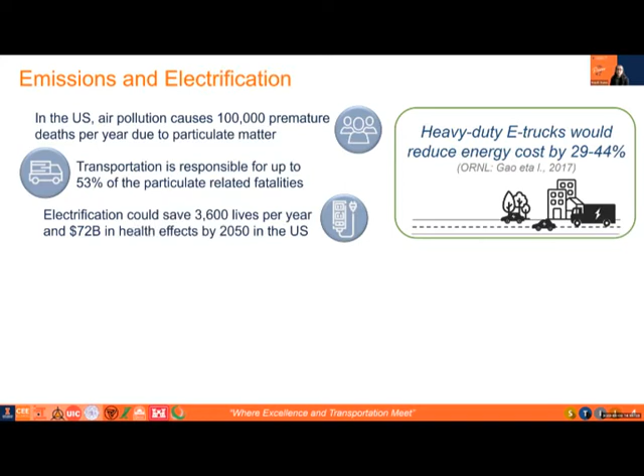Some studies have identified that by introducing electrification, facilities to support electric vehicles could actually save over 3,600 lives per year, in relation to $72 billion in health effects, with the goal of increasing electrification by 2050 in the US. Correspondingly, the Oak Ridge National Lab estimated in their 2017 study that up to 44% of energy savings can be reached related to electric heavy-duty trucks. So quite a good amount of savings, not only with respect to air pollution, but also energy usage.

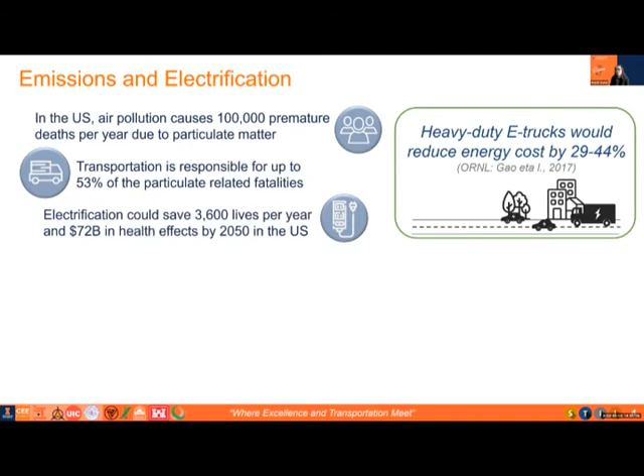For Illinois, just last fall we had recent legislation passed in September, particularly the Climate and Equitable Jobs Act, whose main goal is to be carbon-free in the power sector by 2045 and 100% use of clean energy by 2050.

The month after that, the state also passed the Reimagining Electric Vehicles in Illinois Act, or the REV Illinois Act, where the goal was to reach 1 million electric vehicles by 2030, and also identify tax incentives that can be created both for EV manufacturers and suppliers - the whole scheme of where EV will be touching.

At this point, some other studies can also improve congestion, which we can tie to how it can change Illinois. The studies have reported that leveraging the connectivity between vehicles, even in platooning - simply how they're placed as they're moving through our highways - could improve fuel economy by 39%.

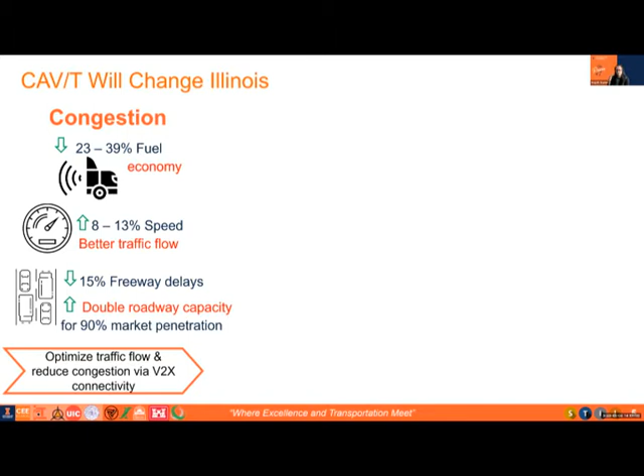And because of that connectivity, one may anticipate that we can increase speed, which also can be related to improved traffic flow, reduction in delays by 15%, and assuming a 90% market penetration of connected autonomous vehicles, it may double our roadway capacity, as you can see here, which will be really nice as it can reach our goal in optimizing traffic flow and reducing congestion simply by leveraging that vehicle to everything connectivity.

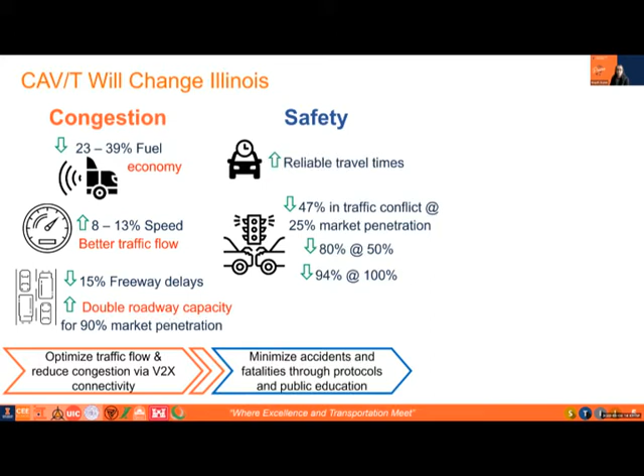Now, with respect to safety, that's also something that the introduction of CAV&T, properly done, can really improve, as that connectivity can also leverage providing more reliable travel times. Researchers have estimated that as you increase market penetration, traffic conflict can range from 47 to 94% when market penetration ranges from 25 to 100%, which we can anticipate will help us minimize accidents and fatalities by leveraging how we can create new protocols and also extending that to public education.

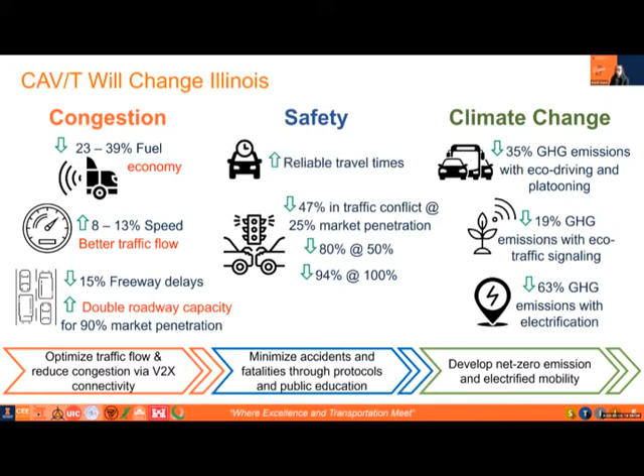And correspondingly with climate change, with the changes I've hinted at previously, some researchers have identified that by implementing eco-driving and platooning, greenhouse gas emissions can be reduced by 35%, and correspondingly with eco-traffic signaling, a 19% reduction in greenhouse gases, and electrification can further reduce greenhouse gas emissions by 63%, which, connected to some of the laws that Illinois just adopted last fall, will help us meet this goal of developing net zero emission goals and an electrified mobility.

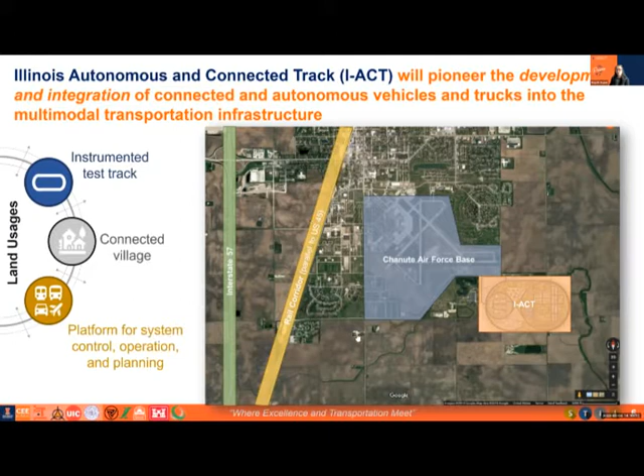And also we have the village of Rantoul just adjacent. So highlighting that apart from the facility, we also have nice options for validation and other jurisdictions that we can work with, just within 1 mile of proximity to the IACT.

As we know, right now we're all at home, or I hope you're staying at home given the snowstorm we're undergoing, which is going to be a critical issue when connected autonomous vehicles get on our roadways.

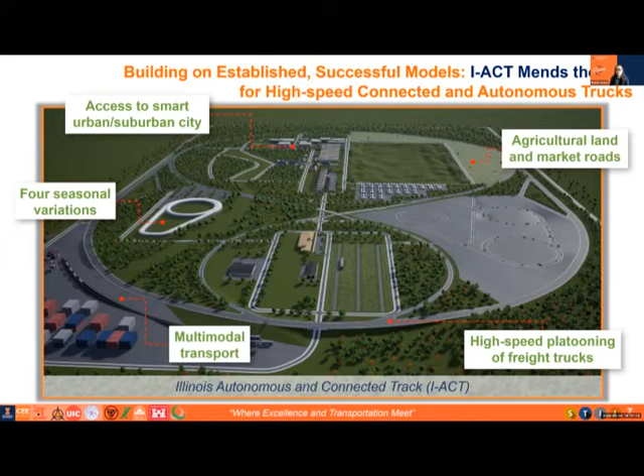So here's a short video, and let me remove the sound. We're zooming into Rantoul, which we just saw on the map earlier, and now we're going to be driving through the facility.

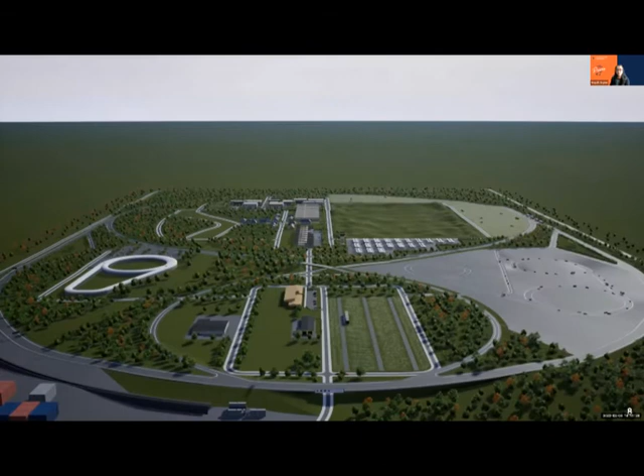So we'll start with here, this is the outer loop. We have 3 lanes that the freight trucks can platoon constantly at 75 miles per hour, which will be the fastest speed that a track can host a continuous platoon looping over the entire I-ACT.

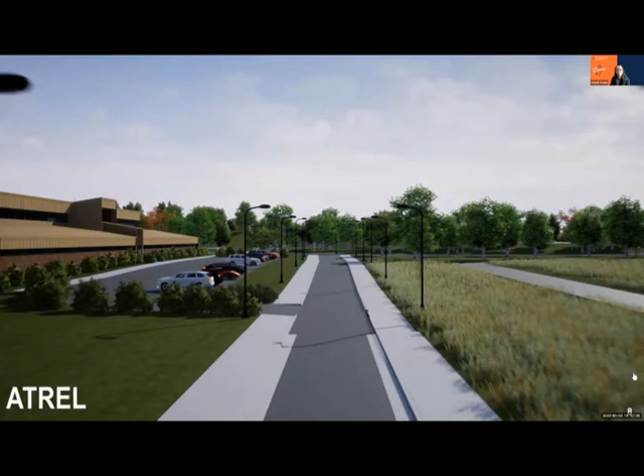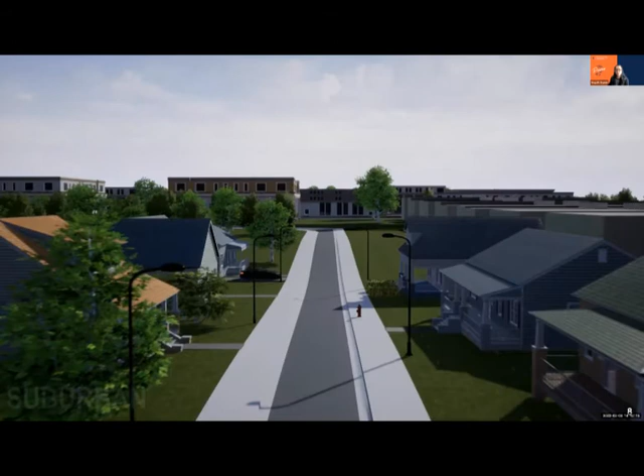We're going now to the inner loop, and that's important—you can imagine that, maybe related to arterial roads. Here on the left are actually existing facilities. Our lab, ATREL, the main infrastructure of ICT, will have a control tower for new offices. And here, a suburban and urban setting for more test cases and scenarios.

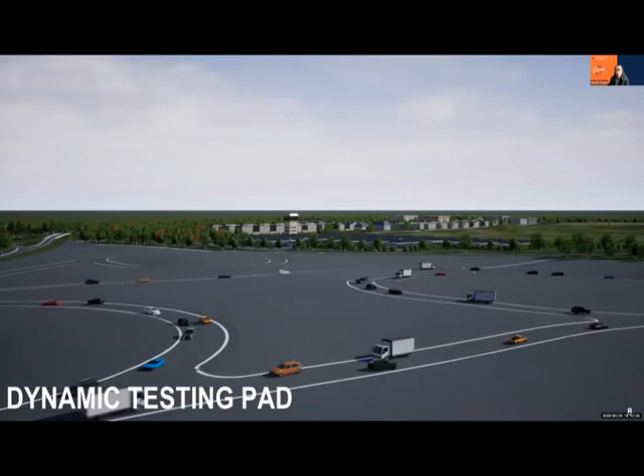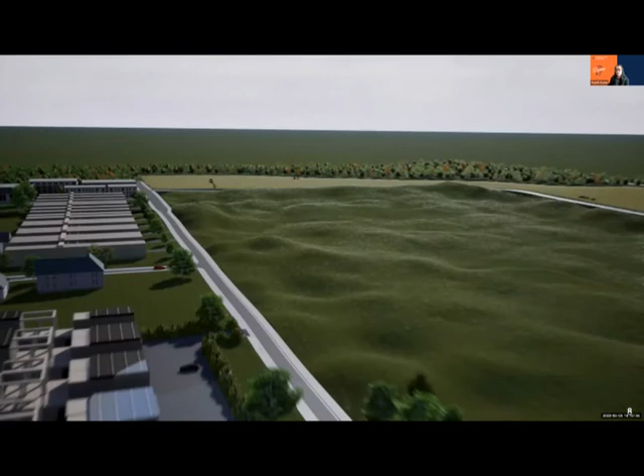We'll also have an environmental test chamber where we can subject vehicles to different conditions, and a dynamic testing pad for different vehicles. Multimodal mobility with rail, and also an agriculture testing area, trying to capture the cases in Illinois and beyond that we can anticipate as we're growing into adopting connected and autonomous vehicles. And so what we believe in is also building on Illinois' strengths.

I've mentioned that speeds can be up to 75 miles per hour, with different controlled weather across 4 seasons, urban and suburban settings. With the mode of transportation, we've seen there will be different modes as we anticipate what our infrastructure handles, and the infrastructure itself will be connected. I'm not only talking about putting sensors in the roads, but also in bridges, potentially tunnels. These are under discussion as we plan I-ACT, along with the energy grid as we support electrification and energy harvesting needs for the track.

So I've said some of the key things I-ACT intends to focus on and harness: high-speed freight platooning, multimodal logistics, and the development of protocols, where the findings will boil down to how to safely deploy these technologies and vehicles in a connected infrastructure.

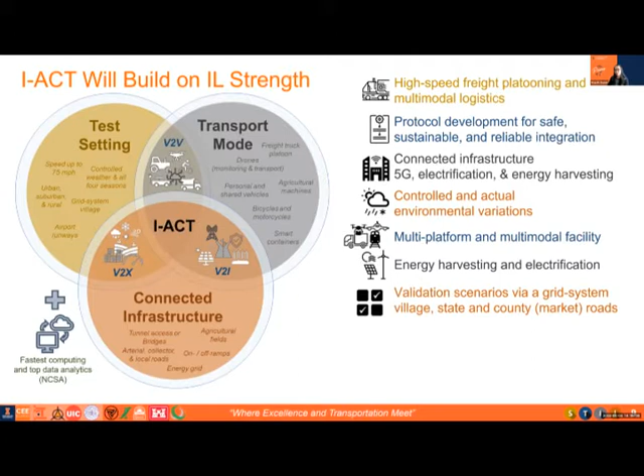I've highlighted in the map earlier the proximity to Rantoul and adjacent interstate or local roads. That also offers validation scenarios for us that can closely relate to the controlled conditions we'll have in I-ACT.

Speaking of Rantoul, this is also quite important economically and socially, as Rantoul used to be a really active town, given it was a training ground for the Air Force, but since it closed down in the 90s, there has been a decline.

So not only does I-ACT offer opportunities to incentivize research and collaboration opportunities, but also direct economic growth within Rantoul, scaling up to the county and to the state and beyond.

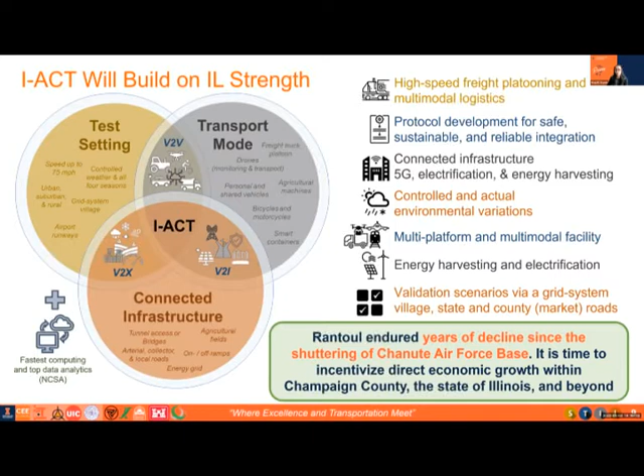Also, education and training programs are part of the award for the Investment for Growth.

Today, after my presentation, either Professor Chen or Professor Ouyang will be sharing with you what this project is about: modeling and testing autonomous shared multimodal mobility service for low density rural areas.

I do want to highlight that 2 other projects will be highlighted next week for V2V sensor streaming and wireless continuous monitoring. Towards the end of this semester, by April 28th, we will have Professor Kwiat share their findings related to the quantum communication network.

As I've mentioned, part of this growth program grant was also to create a new education training program, which will be a Master of Engineering in Smart Mobility. It will be cross-disciplinary, with 3 tracks currently under plan: a certification program for professional students, and then 2 master's programs related to autonomous mobility infrastructure systems and mobility services, economic and policy.

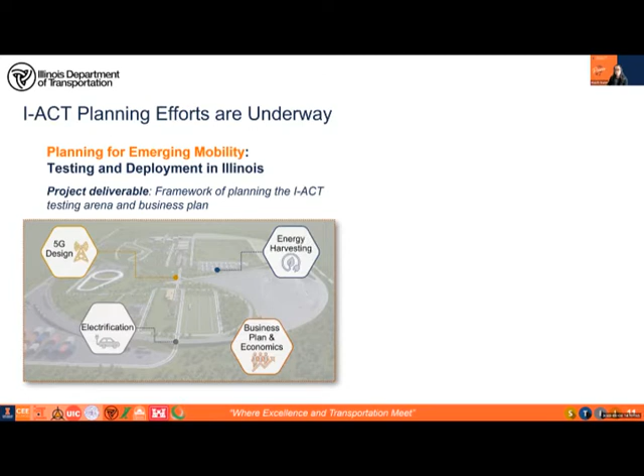Adjacent to that, we also have an IDOT-sponsored project focused on identifying frameworks related to 5G, electrification, and energy harvesting as part of the I-ACT testing arena, and also the business plan.

In parallel to that, we have a project I'm quite excited to be part of, Mobility 4.0, where the main idea is to create a roadmap or blueprint identifying, within the state of Illinois, what resources and activities are happening to clearly prepare and identify Illinois' readiness for connected autonomous vehicles.

Now, with respect to the timeline of planning and construction of I-ACT, a good part of the land has been pledged by Rantoul. We are working on procuring the additional land, which is really governed by the design speed of 75 miles per hour on the outer loop of the track.

We started the feasibility and project approval prior to the pandemic, and last year a consultant was brought in to do the conceptualization and environmental site assessment of the proximity limits of I-ACT. Hopefully by the middle of 2023 we'll break ground and construction and instrumentation will happen. The following year we hope to have the major roadways constructed and ready for testing by 2024. I do want to note these dates are pending update after the conceptualization phase of I-ACT is completed this summer.

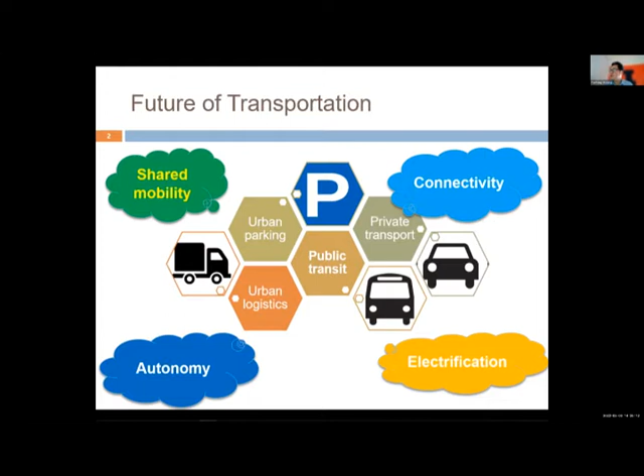We all know a lot of revolutions are happening right now in the field of transportation, and a lot of these buzzwords are being repeatedly used, which we are very excited to be working on. But I want to mention that a lot of this work has been done in urban areas, mostly focusing on congestion. The issue is about capacity being largely smaller than demand, causing congestion, and how do we alleviate that?

In most rural areas, the problem is actually the opposite, and very often it's due to low demand density. The issue is the lack of enough demand to supply the capacity. It's very hard to justify maintaining a dedicated vehicle fleet to serve demand that is very scattered, very low, and very infrequent. Even using public transit is difficult because economically it's hard to provide convenient service with good accessibility, meaning a bus stop near every person's home, since people are so scattered over a large area. This first and last mile issue is really prominent.

So what we're trying to look at is, given the autonomy that's coming and the concepts of shared mobility, how can we develop flexible mobility services suitable for low demand areas, particularly focusing on how to provide the first and last miles to passengers that are scattered. So the major question in this project - we split it so each of us focuses on an area, and we are going to put them together. We are in the process of putting them together.

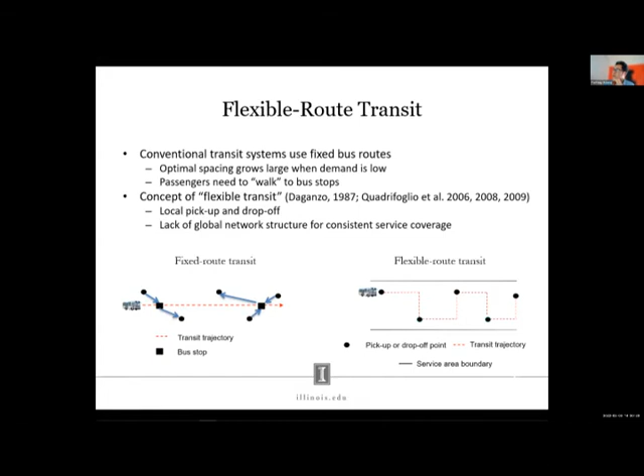The idea of flexible transit has been in discussion for decades. Some of the work we did in this direction explores a compromise in between: instead of having the vehicle come all the way to pick up everybody, maybe it's also beneficial to partition the space into catchment areas, allowing people to still travel a short distance, while the bus comes around and visits certain stops, picking up people from gathering points.

There are some results from our previous work about how to optimally partition space into catchment areas for each bus stop, and how to route vehicles around those stops. There's an optimum shape, which is hexagonal, and so on and so forth.

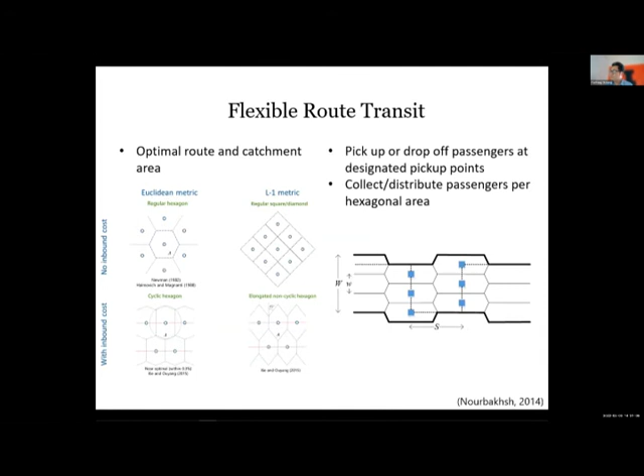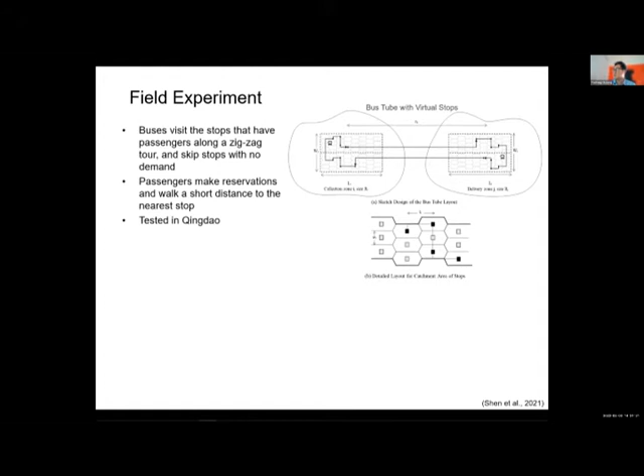Using those results, we were able to develop bus services that allow buses some flexibility, even allowing skipping stops when demand is really low. Only when a passenger shows up at a certain location and calls for service do we visit that neighborhood and pick up the passenger. We have a whole framework for designing such systems.

In earlier efforts, we did some testing with real world data from Qingdao, China, and were able to show that our system's performance is already very good. We can improve double-digit percentages in many attributes, such as passenger travel time, fulfillment rate, and vehicle occupancy. We were happy that this seems to be a promising way of providing services to rural areas.

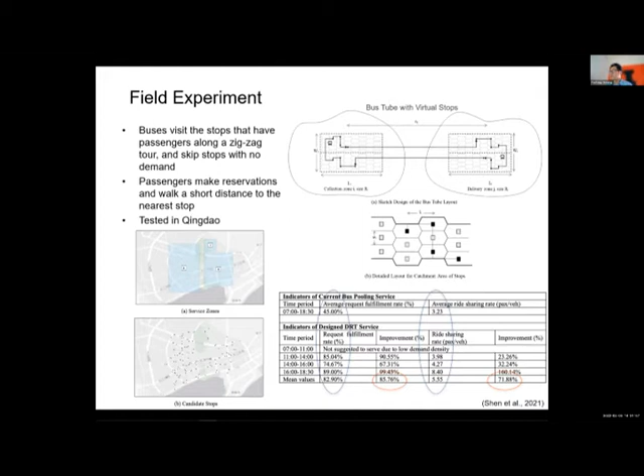Rantoul will probably also be our test bed for this, and we can implement quickly on it. But we also looked into other directions for providing services. Mobility services for rural areas have so many different options—every company could come up with something intelligent and innovative.

Traditionally, we allow people to drive or take fixed route transit, but there's really a spectrum of alternatives, and in recent years people have been very creative. We have taxis that are almost like driving, but allow people to share a vehicle over time. We have shared taxis allowing a few people to share a vehicle even at the same time, where their origins and destinations have to be aligned in time and space somehow. We allow dial-a-ride or customized buses, allowing even more people to share a vehicle at the same time, but flexibly—the route is totally dictated by the origins and destinations of the passengers. And then we have transit plus shared vehicles.

All these are just some samples of opportunities we can explore for rural areas. One of the efforts we made under this STII project is to try to explore some sort of combination across these shared on-demand mobility services—the taxi, shared taxi, and dial-a-ride.

We actually showed that there's a unifying framework we can use to analyze all these services in one mathematical framework. What we did is that they all share the feature of random customers showing up over some space, over some time, and then we have a limited number of vehicles, and we allowed some of them to share a vehicle at a time, and then we use these vehicles to move around to pick up and drop off passengers over this confined space. So they share some physical similarities, although they operate very differently.

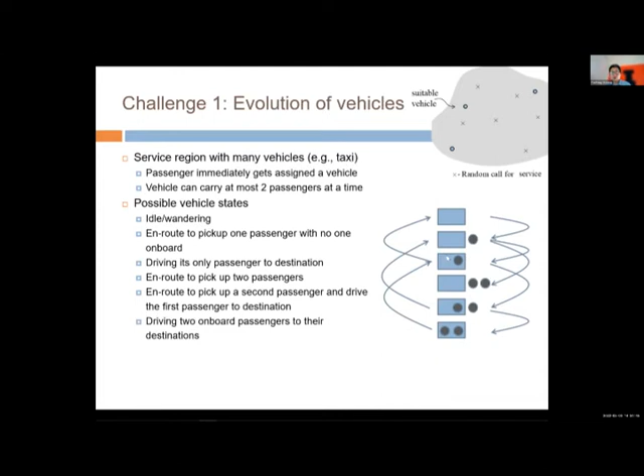So we can keep doing all these things and understand all the arrows showing the transitions. This transition happens each time a pickup or drop off occurs. So every vehicle in our service system can be uniformly described as in one of these possible states, or conditions. And then we understand that each of these states has a duration, whether the vehicle is en route to pick up somebody, or en route to drop off somebody, and so on and so forth.

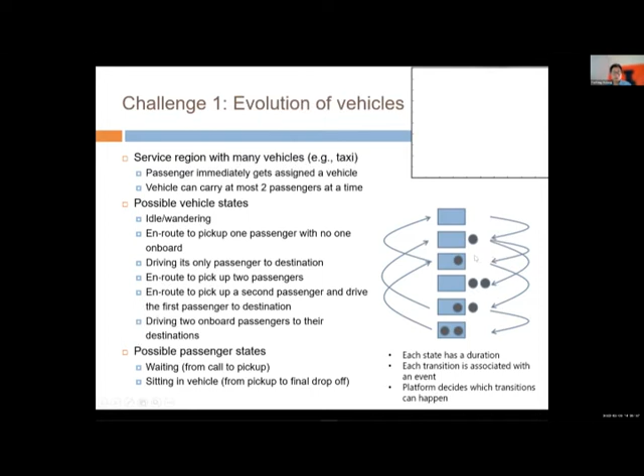This simple simulation shows how the vehicle is moving around in a continuous space, but keeps changing, you can see the marker changing after picking up or dropping off some passengers. You can imagine a city or a rural area, a certain area, where a group of vehicles just keeps moving like that and changing state along with that. But no matter what, the vehicles are going to be in one of those predefined states, and then we can model the time it needs to be in each of the states, and understand its evolution over time. Then we'll be able to understand a lot of things about these vehicles in terms of the service.

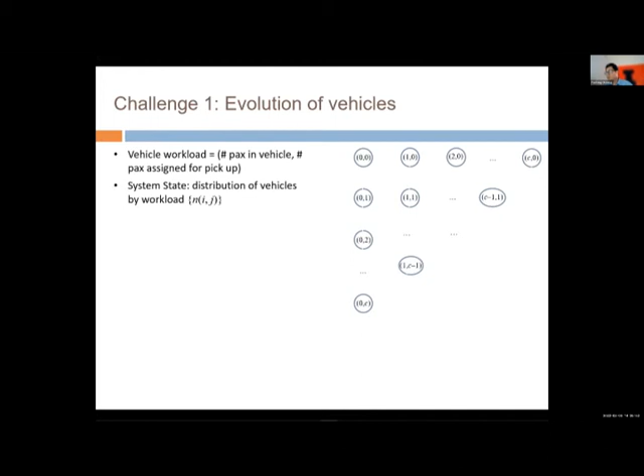I'll just skip this, just say we come up with an overarching model, and we predefine all the possible states of the vehicles in terms of the passengers it has on board and the passengers it's still yet to be picked up. Each of these circles is like a possible type of vehicle, a state of a vehicle. Then any vehicle in your system is going to be moving around these circles dynamically, randomly. And remember the simulation, keep changing markers, it's moving around these circles.

Each of them is like a container with vehicles in it. Then we understand the change of state is based on: you give the vehicle a new customer, or the vehicle just picked up a customer, or the vehicle just dropped off a customer, then the vehicle just keeps flowing according to the arrows randomly in this network.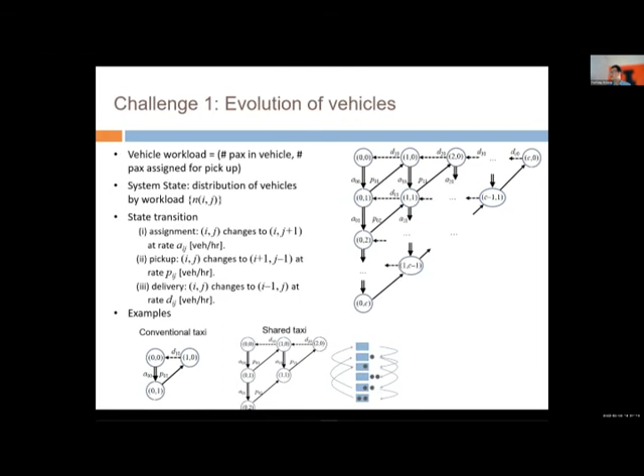We can also keep track of how long it would take for the vehicle to shift from one condition to another. This requires us to do some mathematical modeling. For example, particularly in the shared mobility context, we need to understand if customers randomly show up and the vehicle randomly moves around, what is the expected distance or time it would take for a vehicle to serve a passenger, to do whatever. We need to know how long it would take for the vehicle to finish a job, whatever that job is, either pick up or drop off.

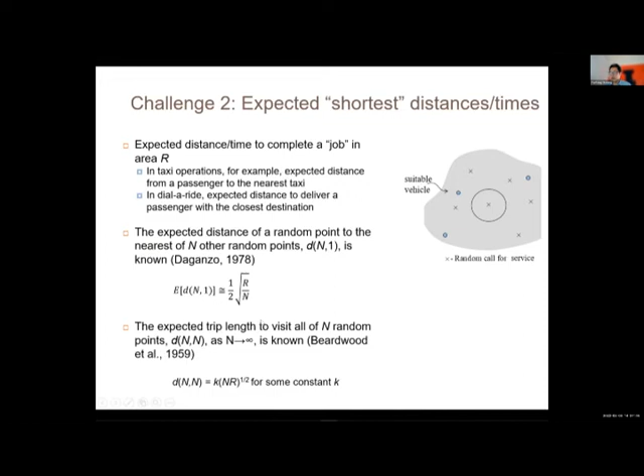So there are some mathematical results that we have from the literature regarding if you have N passengers, you pick up one person that's nearest, how long it would take. If you take all of them, then how long it would take. But then we actually did some new work. If we were to pick up out of capital N people, we need to pick up a lowercase n of them, so we only need to pick up a subset of them, then our vehicle capacity is going to be reached, for example. Then how long it would take for us to do that, right? So this could be applicable to several of the situations we may have in the shared ride context.

We have analytical formulas for that. We were able to show that it's actually quite accurate. We were shocked how accurate it is. Then essentially we have formulas to understand how long it would take for a vehicle to finish jobs. Then we are able to actually do a lot of things to model how long, essentially a Markov chain. We understand how long the vehicle is going to be in each state and so on and so forth.

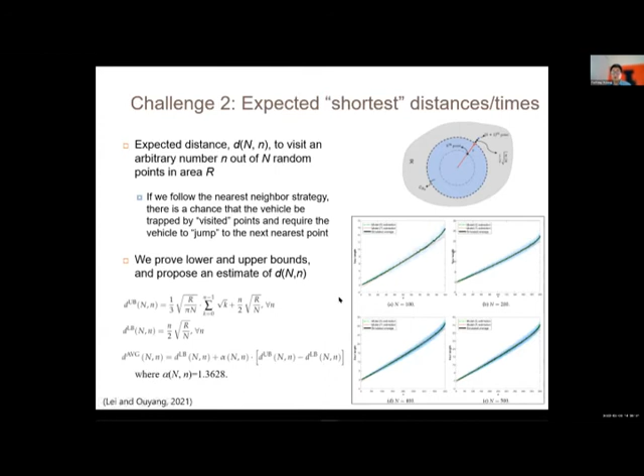So we will have a very good description about the city or the rural area already. And then the last part that I just want to quickly mention is that because we're doing ride sharing, we would want to match customers together. Then certain type of customers, for example, one origin, one destination by one passenger and another passenger, how shall we use the same vehicle to serve them, or should we use 2 vehicles to serve them? That's a big question. So this has to do with temporal and spatial alignment of their trips, right? Their origin destination better be in the same direction. Their travel time should be close to each other. Then they can comfortably share the same vehicle. Otherwise, it will be mad if we force them to share the vehicle.

So with all these considerations, we were able to develop models to understand the probability, how much alignment is a good alignment, and so on. And then the cost associated with forcing people to share the same vehicle, in terms of the vehicle having to be detoured, and also the delay, people have to wait for each other in a sense. Then we were able to derive all kinds of impacts of such sharing operations, and then we come up with very good formulas for that.

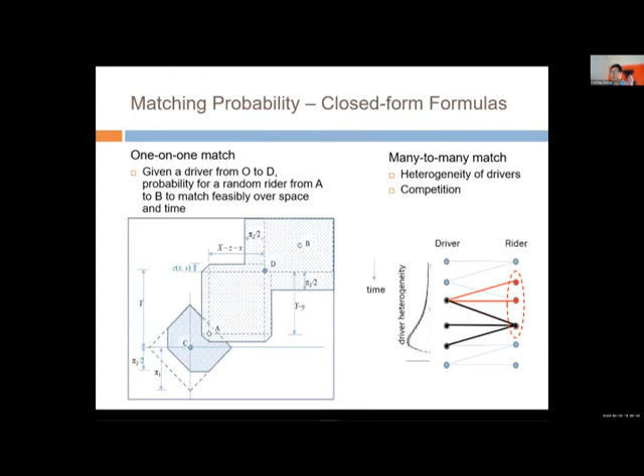And then basically we were also able to show with the simulation, I showed you this already, that we are able to measure our formulas, the model that we came up with, and it actually matches with the simulation almost very well. Let me just say it's very well matched. So we're very happy. That means that our formulas are probably reasonably correct.

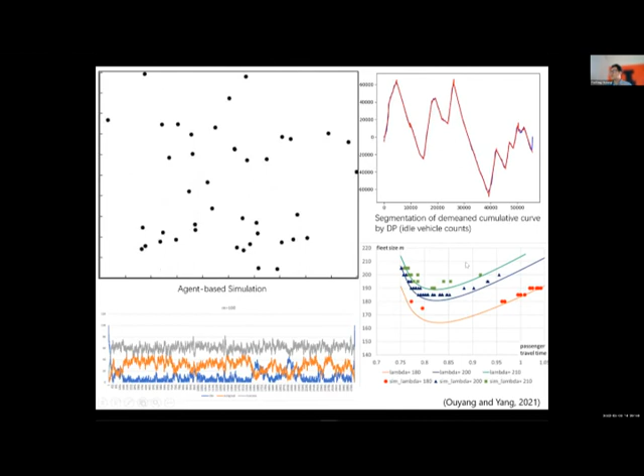So with this, we are able to utilize this framework to analyze a sequence of services. We can actually analyze the traditional transit. We can analyze the flexible transit, so the flexible route transit. We can analyze direct ride, customized buses. We can analyze shared vehicles, shared taxis such as Uber Pool. We can analyze traditional taxis and then automobile driving, individual. This chart shows that we can analyze all these systems using the same framework.

And we're able to show you how the customer service received, the door-to-door travel time for a passenger, expected travel time, is related to the fleet size you provide. And this different curve, this red dashed line, is sort of the efficiency frontier, tells you under different investment level, given a certain demand, or this whole chart is given a demand. This demand density per unit hour, kilometer square, how many people will show up for service. Given that, we can do this for every service we provide.

And then this gives you information about, if you give me Rantoul, which is this plot already given the demand, then what is the best form of service we should provide that will actually provide the best service with the least cost? If you think about the fleet size as the investment level that the agency or the operator has to put in, then the y-axis is the service we can provide.

Then we can actually choose whether we should use conventional transit if we really don't have any vehicles we can afford, or we can use different services or taxis, simple taxis, if we can afford a lot of vehicles. So this helps the decision makers decide what service to provide and how big the service should be.

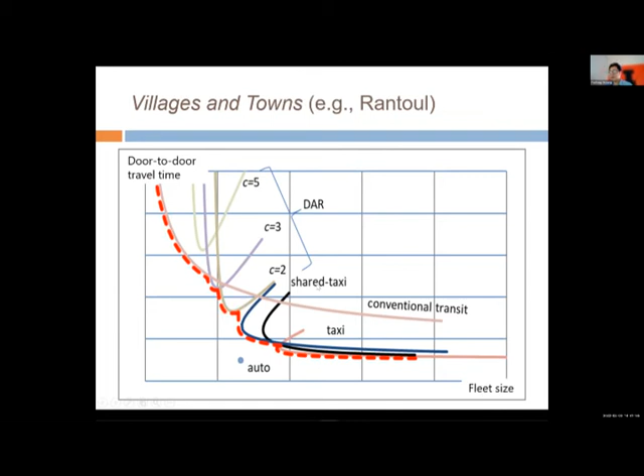Whatever planning we do, we make assumptions about demand, but in reality things are different. So what Professor Chen and his students have been working on mostly is how we can further improve the service if we utilize operational level decisions, such as pricing and service option offerings, so as to affect the demand.

The idea here is that in the real world, day-to-day operations on the order of minutes, whenever a customer shows up, we can give the customer different options. We can give them different vehicles, different prices, and different promises on the time they're going to be picked up and dropped off.

With all these different options and prices, we will be able to influence demand, no longer assuming the demand is fixed, but rather allowing the demand to be influenced by us. And then we can achieve whatever extra goals we want, such as maximizing revenue if we were operators like Uber, or maximizing social welfare if we are representing the village of Rantoul.

So all these things we are doing on the next level of decision making here. We also understand that some people may be more sensitive to delay. For example, on the right-hand side, the chart shows whenever a passenger calls for service, we could give them different vehicle times, different pickup and drop-off times.

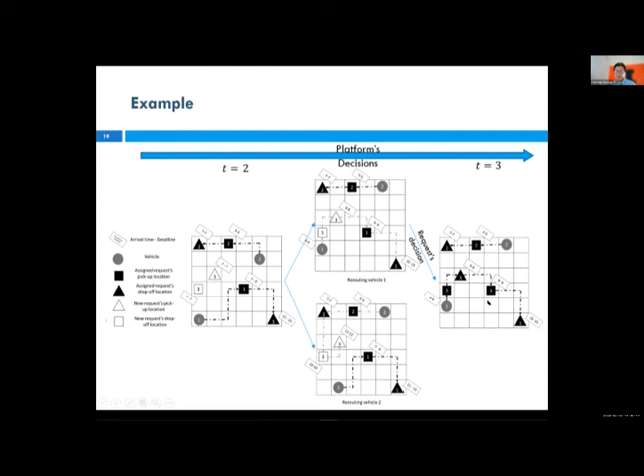So really the problem, the whole decision is in a dynamic decision-making process. Whenever a customer shows up, we decide what to offer to the customer, what price, what options, and then we decide how do we best utilize the vehicles we have in anticipation of the future.

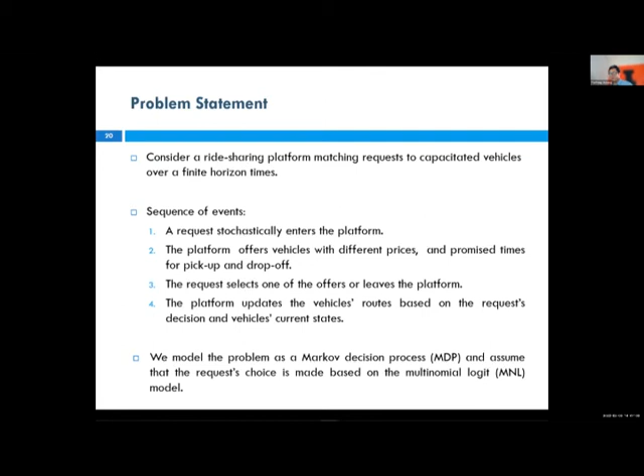My understanding is the model is built as a Markovian decision process, quite similar to what we discussed earlier in the planning model. We describe each vehicle state in terms of where they are, who they are serving, where they're going, and we try to understand the users' behavior based on the options and the utility functions and so on.

I will just briefly mention that this dynamic decision-making process is new in a sense, in terms of the complex real-time decision-making that's going on here.

I'll probably go rather quick here in terms of the decision-making options. Routing is one part - essentially how the vehicles are going to be routed through new and old customers that they already have. Another decision dimension is when the platform is deciding the promised pickup and drop off times for the passengers, it's sometimes wise to leave a little bit of buffer so you don't default on your promises to your customer.

But how much is too much? If you promise too much, the customer may just ditch you. But if you promise reasonably, you may be able to get the customer and yet give yourself a little bit of flexibility for other customers. So essentially this buffer is a big decision here in operations - how much do you promise?

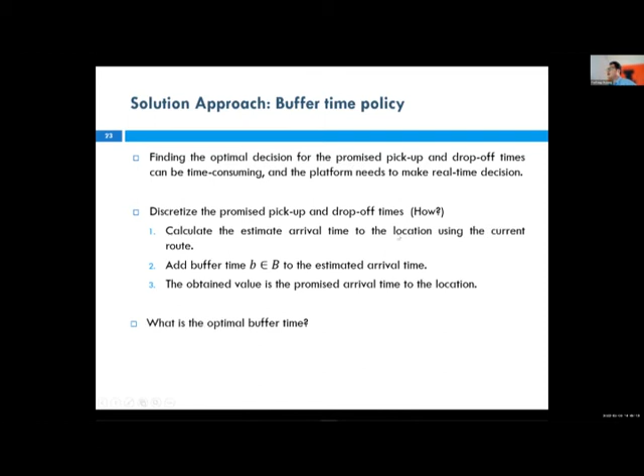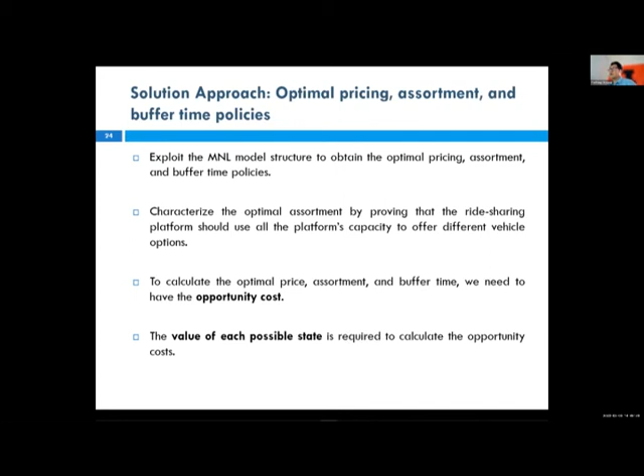Then some other decision - again, already mentioned - the price for each subset of vehicle. Which vehicles do you offer to pick up the passenger? And what prices are associated with each of them, and so on. If we were to put all these things into decision - which vehicle to send to pick up the next passenger, at what time, and how much we charge for that - these are all our decisions.

In order to make that decision, we really need to understand the entire operation of the system, the entire state of the system. We need to know exactly at the moment of decision-making, where are my vehicles? How do the vehicles look? Do they already have a passenger on board? Do they have somebody they still yet to be picked up?

I need to know essentially everything about how the entire fleet is looking, and all the other customers not yet picked up. I need to know all this different information - this information serves as a basis for me to make a decision.

In the so-called Markovian decision-making process, we try to approximately optimize the problem through dynamic programming algorithms. The idea is that if we have a complete description of the vehicle state and the customer state, then we come up with a so-called policy. The policy essentially is that whatever snapshot you take of the system, that photo is going to trigger a mapping from the photo to a decision about which vehicle you should use, how, routes, price, and so on.

Then I'm going to trigger an action to follow next. And in order to do the ADP, I'm not going to go into the details, but essentially the whole idea is we need to have a value function, so-called value function. It's sort of the relative value of a certain state of the system.

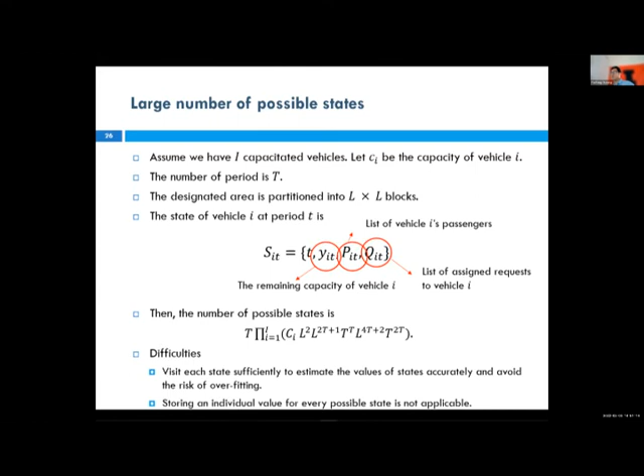So I think Professor Chen and Ephraim developed some ways to aggregate the state. Essentially there are so many states it's becoming intractable. They try to find a way to aggregate the state, identify which dimensions of the states are important and which are not, and then they were able to reduce the dimension of the states and make it manageable.

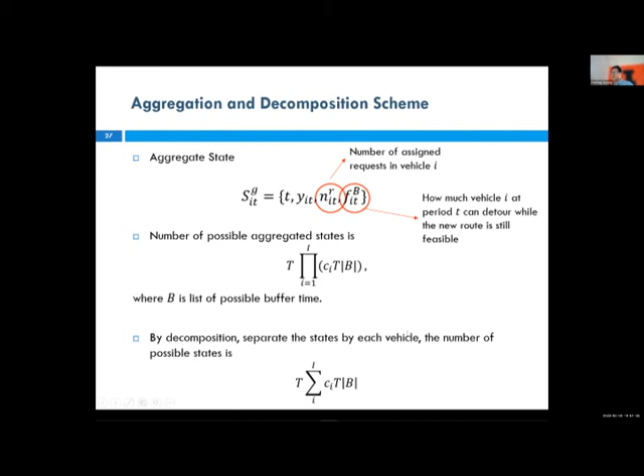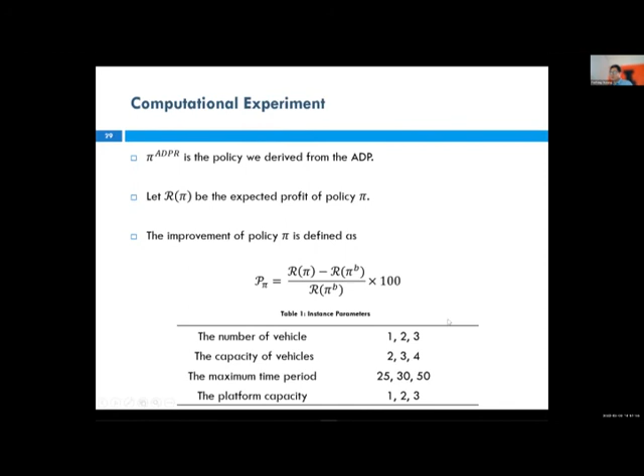This slide is about that, and they did all this nice work. They were able to use approximate dynamic programming to solve the problem. They also tested their approximate dynamic programming method, the policy they get from their model, against some simple models and simple policies that people otherwise can think of. They were able to show that with some test cases there are already significant benefits obtained by applying the model they have.

So the contribution is that for this dynamic operational level decision making, they were able to come up with an optimization framework to address the demand management side of things in real time. A very complex problem being solved by observing the structure of the problem. The problem can be solved within milliseconds, so it's actually very nice.

Just the last part, I promise, within half a minute to a minute, is actually the last part we are still working on. Our project is ending soon, but as a seed project, we see this as a starting point for some new project in the future. We are putting everything now into an agent-based simulation platform, particularly for Rantoul.

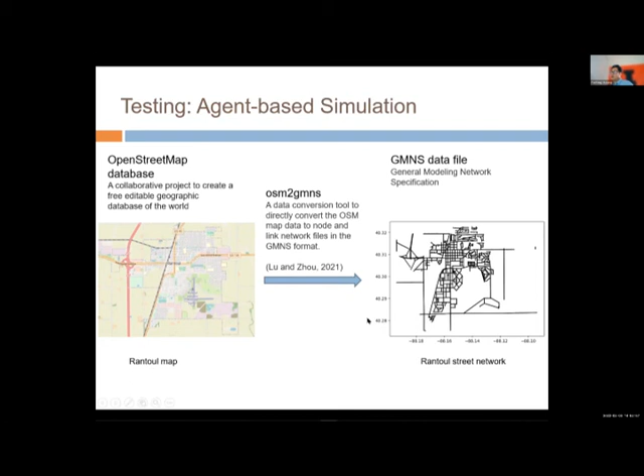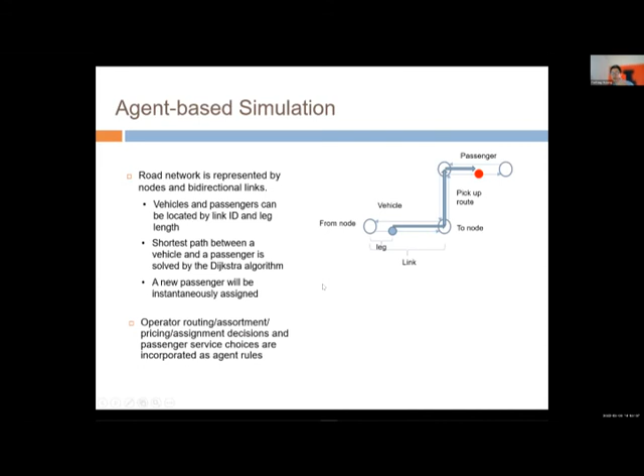So my student got this OpenStreetMap. We're using some software where we were able to convert any street map into a network representation. This is for Rantoul, and this whole thing is actually automated. We were able to do treatments for how the vehicle routes work, the agency and operator decision making, and the passenger decision making. We put them all into the agent-based rules.

This is still work ongoing, but essentially the idea is that we are going to be able to simulate the system performance for a real world network, and we'll be able to see how the predicted performances from our model apply to a realistic Rantoul testbed here.